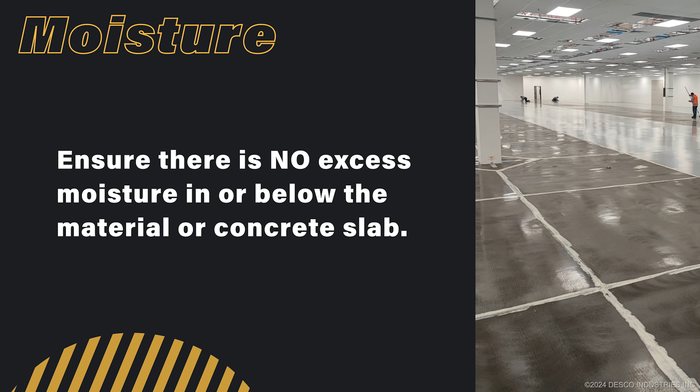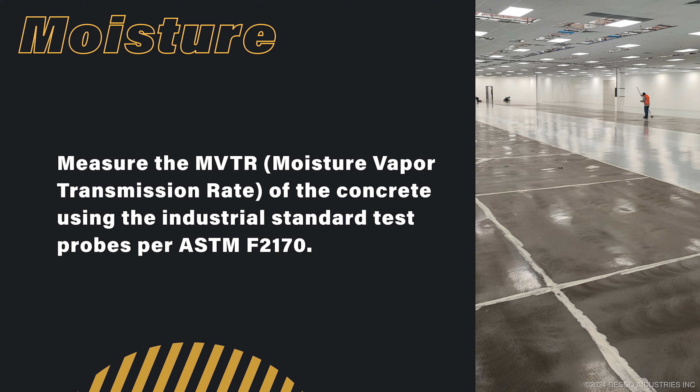For applications on concrete or porous surfaces, ensure there is no excess moisture in or below the material or concrete slab. Prior to installations, you will need to measure the MVTR of the concrete using the industrial standard test probes per ASTM F2170. The moisture levels cannot exceed 6 pounds per 1,000 square feet per 24 hours a day.

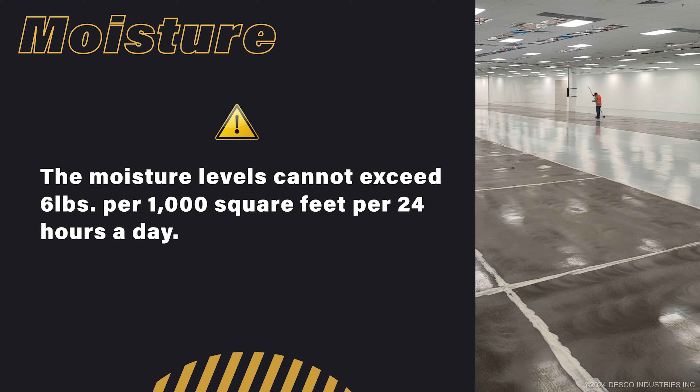Ensure that your floor is porous and breathing well before performing the test. It is porous enough when a few drops of water dropped on the surface readily absorb within 30 seconds. If it is non-porous, then sand it with a very abrasive sandpaper to open it up. One test should be performed every 1,000 square feet of space.

For limitations, do not install with relative humidity of concrete slabs that exceeds 75%. And use only when the substrate temperature is in between 65 degrees Fahrenheit and 85 degrees Fahrenheit. The proper floor pH before application should be 7. If the floor tests above pH 7, the floor must be neutralized before installing the Statguard Conductive Epoxy.

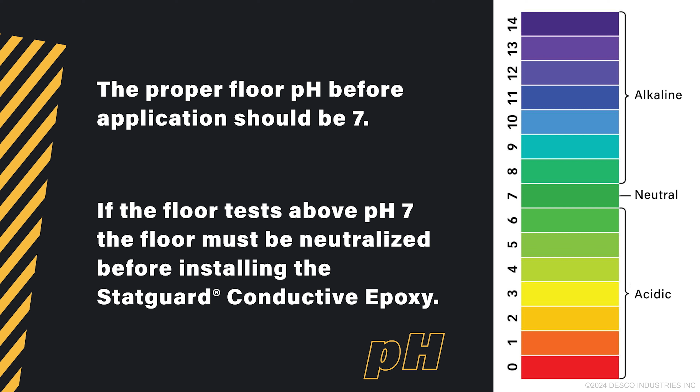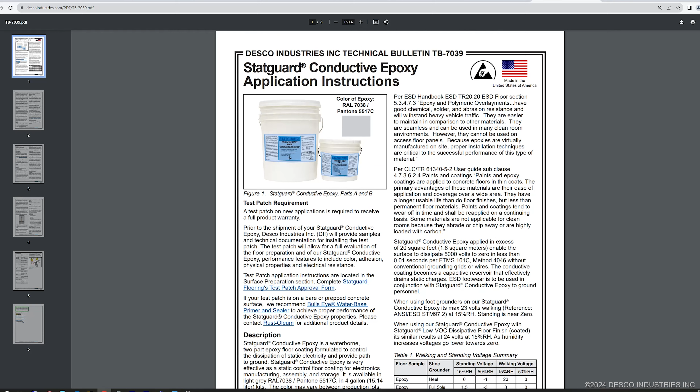For subfloor preparation, please review the technical bulletin on the Statguard Flooring's website for complete detail. For concrete subfloor preparation, make sure to follow ASTM F710-11 in preparing concrete subfloors to receive floor coatings. Fill all cracks, depressions, etc. with a leveling compound according to the manufacturer's specifications.

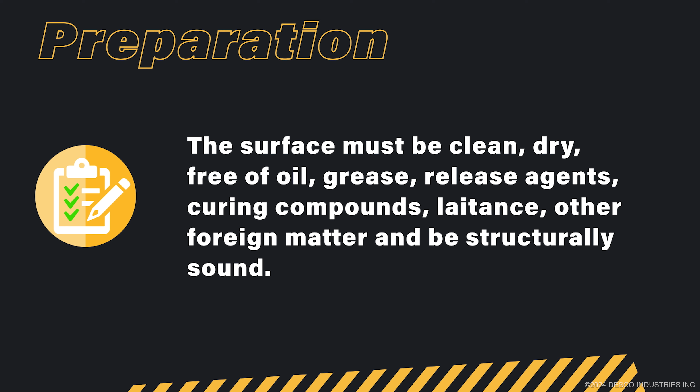Before beginning the application process, the surface must be clean, dry, free of oil, grease, release agents, curing compounds, laitance, other foreign matter, and must be structurally sound. Epoxy primer is recommended for applications on bare and prepped concrete surfaces. Use a compatible primer such as a Bulls Eye water-based primer sealer. Using Statguard Conductive Epoxy on improperly prepared surface will void product warranty and will cause product failure.

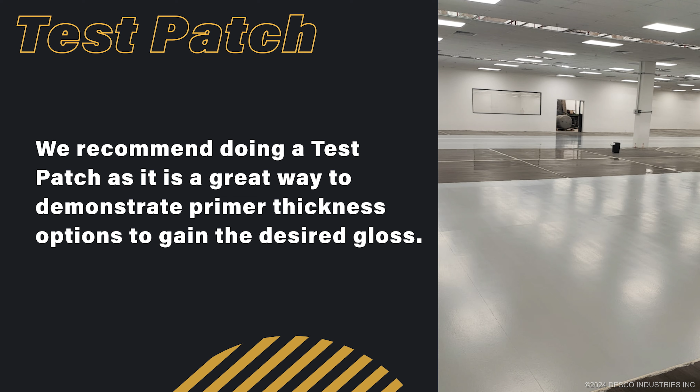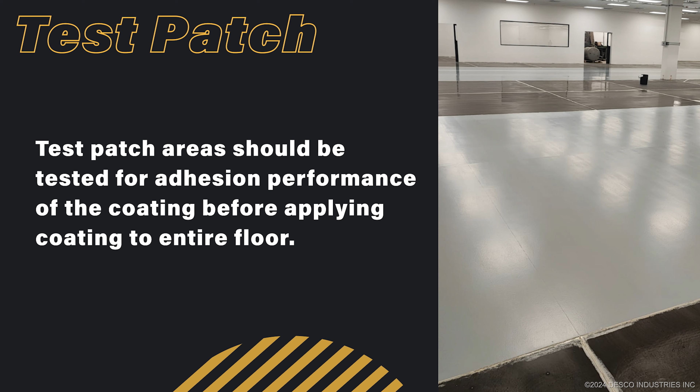For this application, you will need these materials: a 1/8 inch notched squeegee, a 3/8 inch nap roller, and a mixer tool. Use an industrial paint mixer blade designed for two-part epoxy and electric mixer. We recommend doing a test patch as it is a great way to demonstrate primer thickness options to gain the desired gloss. Test patch areas should be tested for adhesion and performance of the coating before applying coating to the entire floor. For more details on testing, make sure to view the technical bulletin posted below and on the Statguard Flooring website.

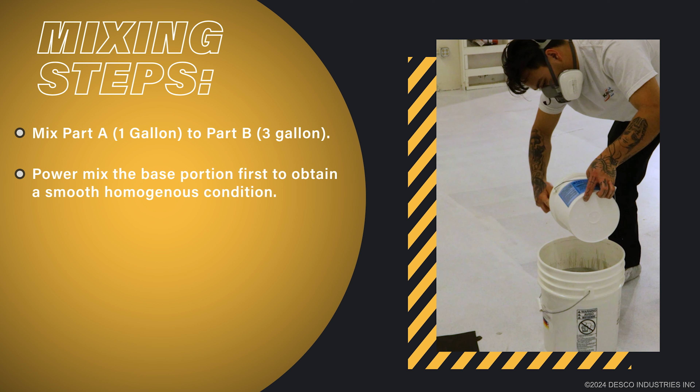Statguard Conductive Epoxy is a two-part product supplied in a 4-gallon kit which contains the proper ratio of ingredients. The entire components of each container must be mixed together. Mix Part A, the 1 gallon, to Part B, 3 gallon. Power mix the base portion first to obtain a smooth, homogeneous condition. After mixing base portion B, add the converter slowly with continued agitation. After the converter addition is complete, continue to mix slowly.

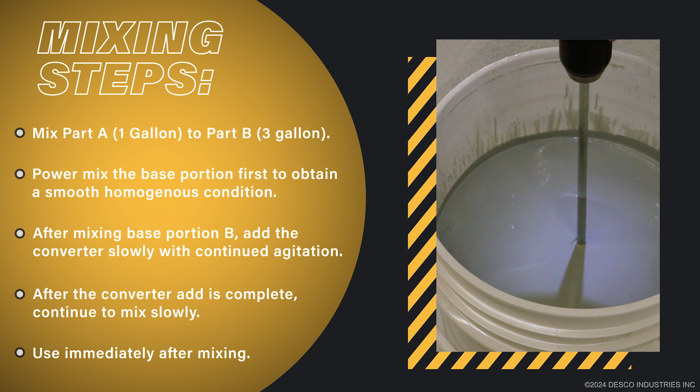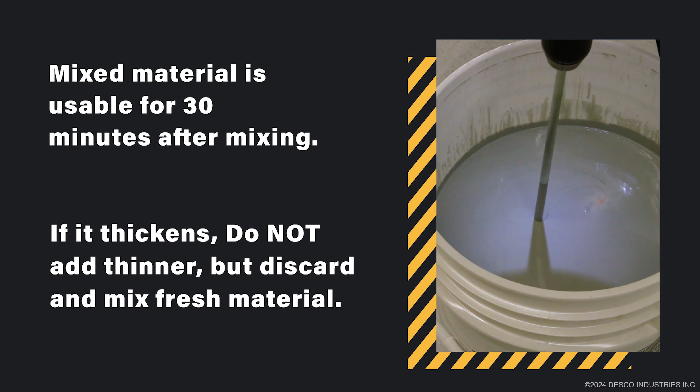Use immediately after mixing. Mixed material is usable for 30 minutes after mixing. If it thickens, do not add thinner, but discard and mix fresh material. Caution: thinning is not recommended. Adding water will reduce conductivity of the coating.

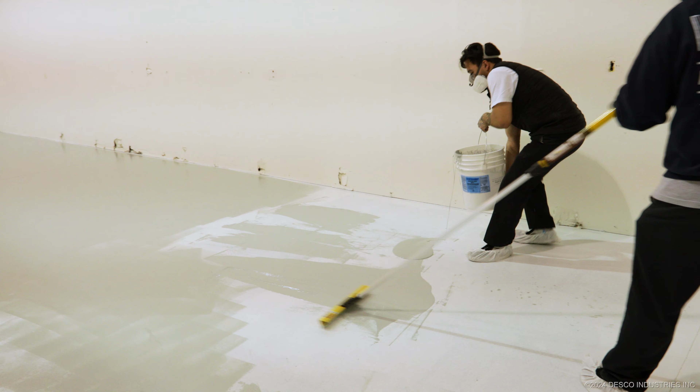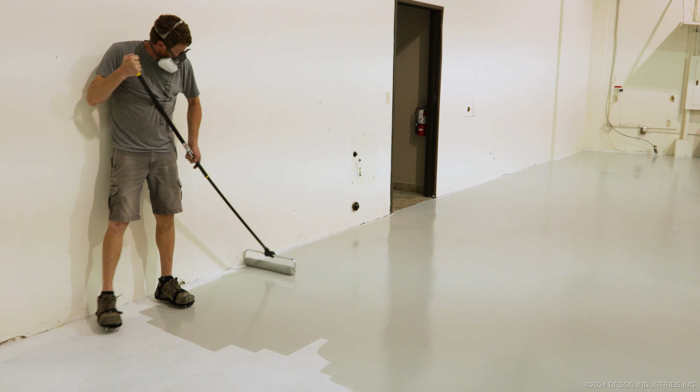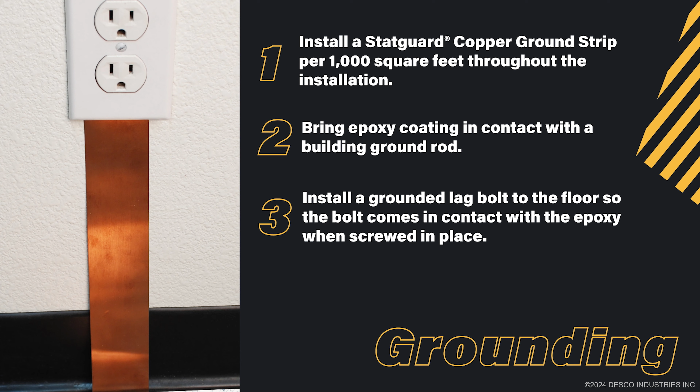There are 4 examples on how to achieve a grounded connection to the epoxy surface. One is installing a Statguard copper ground strip per 1,000 square feet throughout the installation. Second is bringing epoxy coating in contact with a building ground rod. Third, install a grounded lag bolt to the floor so the bolt comes in contact with the epoxy when screwed in place, or bolt a grounded metal plate to the epoxy surface.

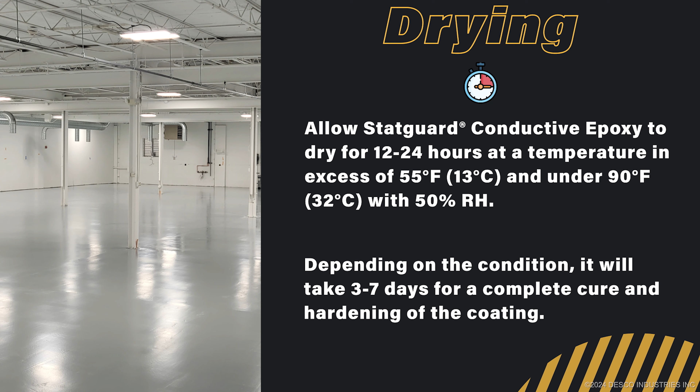Allow Statguard Conductive Epoxy to dry for 12 to 24 hours at a temperature in excess of 55 degrees Fahrenheit and under 90 degrees Fahrenheit with 50% RH. Depending on the condition, it will take 3 to 7 days for a complete cure and hardening of the coating.

Statguard Conductive Epoxy can be overcoated or sealed with Statguard Dissipative Floor Finish to increase durability, enhance shine, improve ease of maintenance, and seal out dirt and debris. 2 coats are recommended. 3 coats will improve electrical properties, durability, and reduce frequency of maintenance.